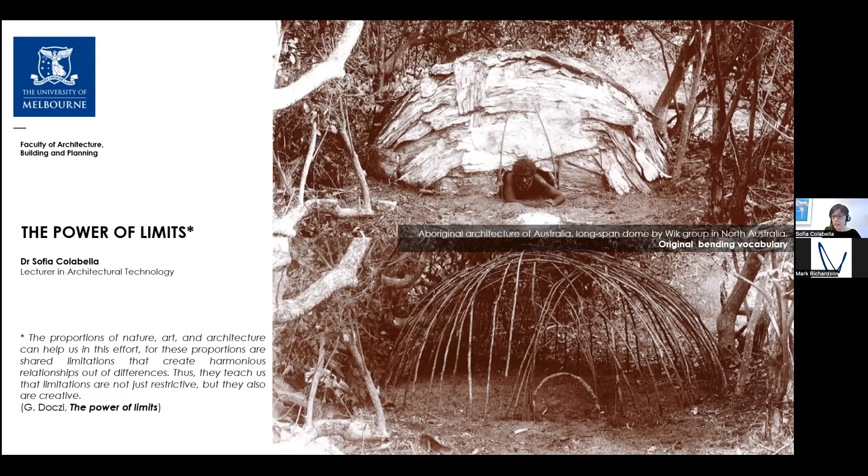My PhD thesis tested the hypothesis that socio-technical, environmental, and architectural gains could be achieved through innovative architectural and structural uses of small timber laths. At the time, I was still trying to understand what Ted Happold and Frei Otto had achieved on one of the most iconic elastic grid shells in the world, the Mannheim lattice shell, with its 4,700 square meter covered area and only 72 kilometers of 50 by 50 millimeter hemlock.

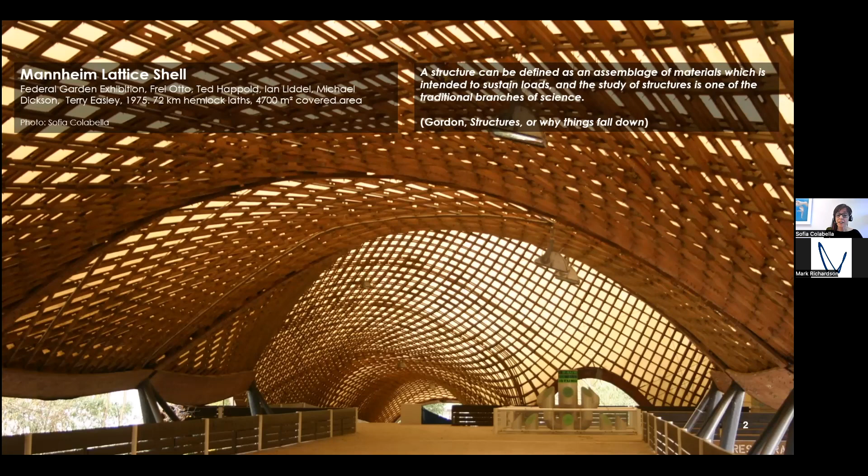From an architectural perspective, the critical advantage of active bending has always been the chance of free-form shapes with easy-to-produce linear rods. Since my doctoral degree, I've been designing timber grid shells and acoustic shells by combining advanced digital tools and low-tech building techniques. Among the outcomes of my PhD, I co-founded GridShell.it, a firm specializing in design and construction of timber spatial structures. And my former business partner and I started testing bending structures at scale 1-to-1 in 2006.

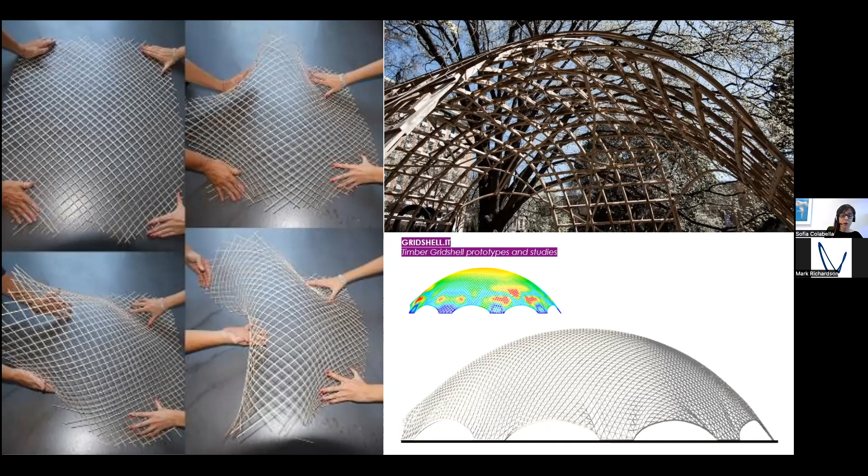We started with physical models and simulations of the design of the construction process, focusing on how the constraints and the orientation of the flat lattice determine the final shape. At the time, this was a story of trial and errors, and we learned a lot from failures, of course. 2012 was a milestone for us as we had gained good experience in grid shell construction and also started developing digital tools for determining the final shape.

This was a real-scale prototype proving the results of a form-finding tool written in Grasshopper by Daniele Lancia and Andrea Fiore to predict the final shape of a flat grid given the connections to the ground. It then became apparent that we had to flip the process and start from the architecture, so the final form, in a way to combine an optimal construction process with stability and the final shape.

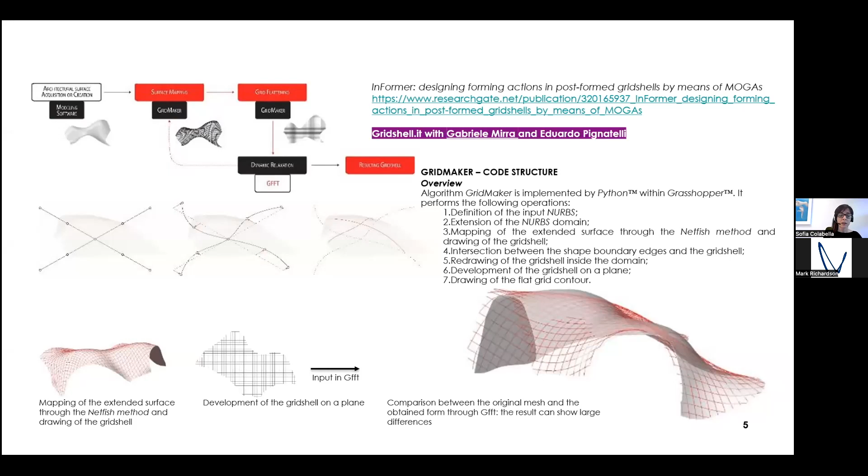In this case, we worked with Gabriele Mirra and Eduardo Pignatelli to develop a multi-objective genetic algorithm to discretize a generic surface into a grid of quads. With the Netfish method, we optimized the orientation of the grid to minimize the lath curvature. And then moving away from that as an independent researcher and passionate about large span architectures and environmental awareness, I extended my studies to discarded materials.

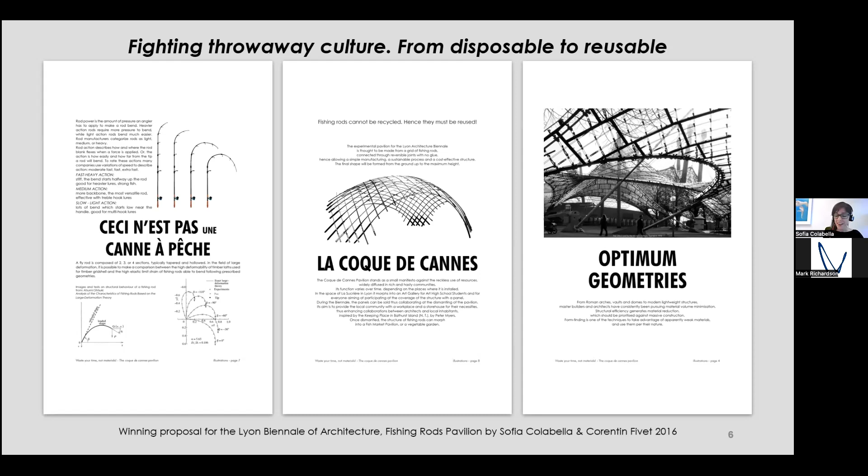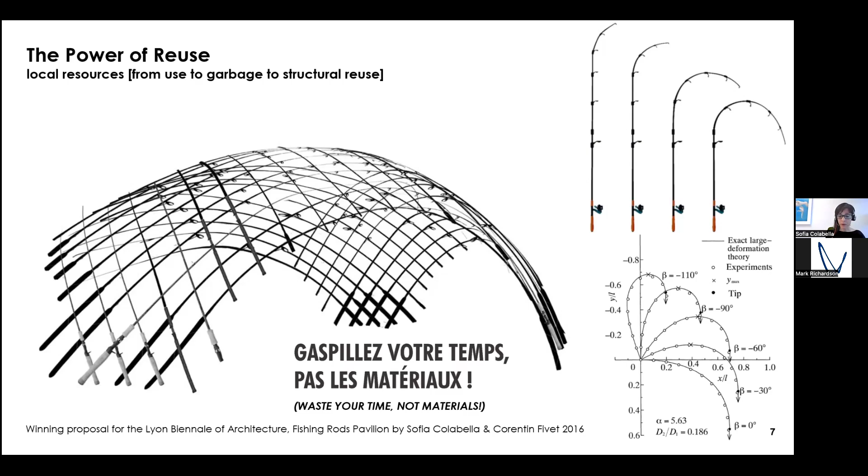And in 2016, Corentin Fivet and I submitted a proposal for the first Biennale of Architecture in Lyon made of discarded fishing rods because of their large deformation when in use. The committee of the Biennale, of course, was enthusiastic, selected our proposal and asked us to design a pavilion to be showcased around the city. However, we discovered then that Swiss people are not so much into fishing, and it turned out that skis were the perfect locally sourced material, as Swiss people throw away thousands of skis each year.

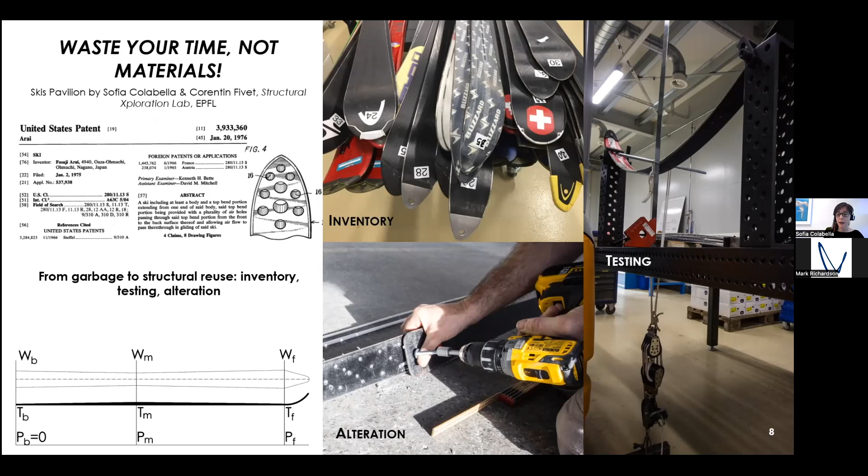And from a structural standpoint, skis have great potential for use as structural components because despite usage and age, they maintain their high-level physical characteristics, high breaking strain, as well as low modulus of elasticity. And obviously, the inventory was not the easy part, especially because skis are often covered by patents and their composition, elasticity and mechanical characteristics are difficult to determine.

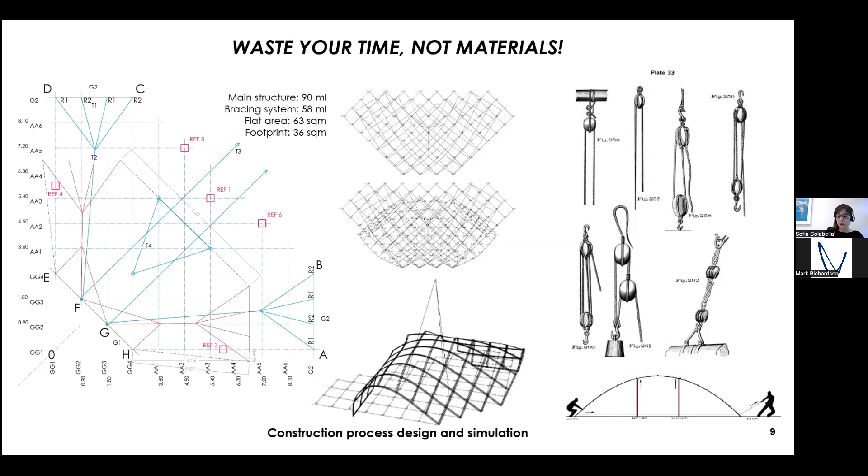Once I defined the modulus of elasticity of each pair of skis, I tested possible shapes derived from a dynamic relaxation simulation. The shape we selected was then converted into a construction process that had to be simple and cost-effective. So we chose to use the simple technology of the block and tackle pulley system, which allows trading force for distance. That was a way to also retrieve an old and discarded tool from the past.

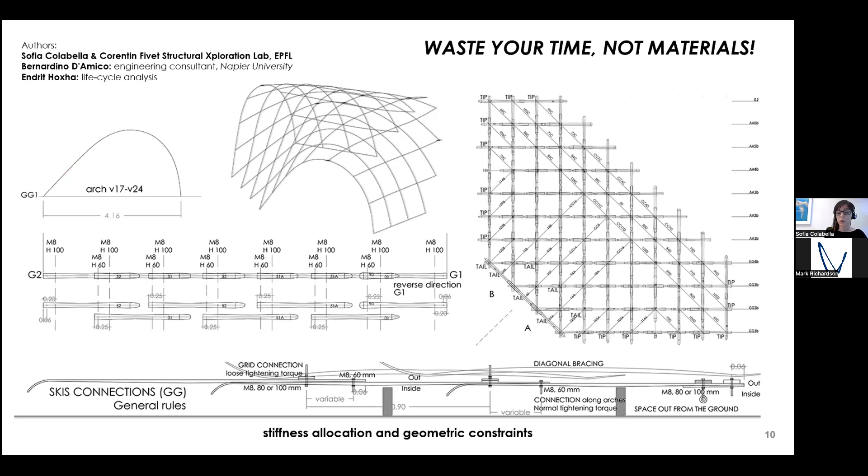Skis of different ages and types, of course, as you can imagine, had different stiffness and had to be optimized. However, the good thing was that with elastic grid shells, the geometric stiffness of the shell is not uniform as well. Therefore, the layout of the skis was designed according to the skis' elasticity, compensating for the minimum radius of curvature and the overall geometric stiffness to ensure stability and minimize deflections.

Corentin Fivet and I, of course, didn't intend to propose people to build with skis, but we intended to show that we can design with uncontrolled components with a sufficient level of confidence in the structure, safety, and performance by working on structural efficiency and redundancy.

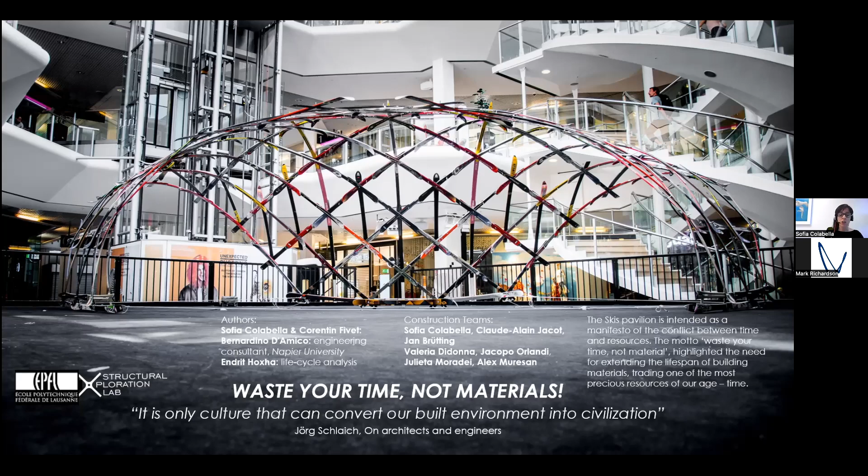The 36 square meter skis grid shell was made of 210 reclaimed skis. It was assembled and reassembled 6 times with traditional tools, also generating near zero waste. It showcased the value of waste, thinking out of the box of our culture, based on the idea that time is the most valuable resource we have. We acknowledged that designing with reclaimed materials implies a complete redefinition of the conventional structural design workflows.

Most of the research-based subjects, design studios, and intensive construction workshops I developed over time take advantage of all these experiences. So as a practitioner, as a carpenter, and also as an academic, active bending is also useful for performance-based design education, focusing on structural behavior and acoustics in my case. These subjects tend to acknowledge the responsibility of architects to minimize the impact on natural resources and design for longevity.

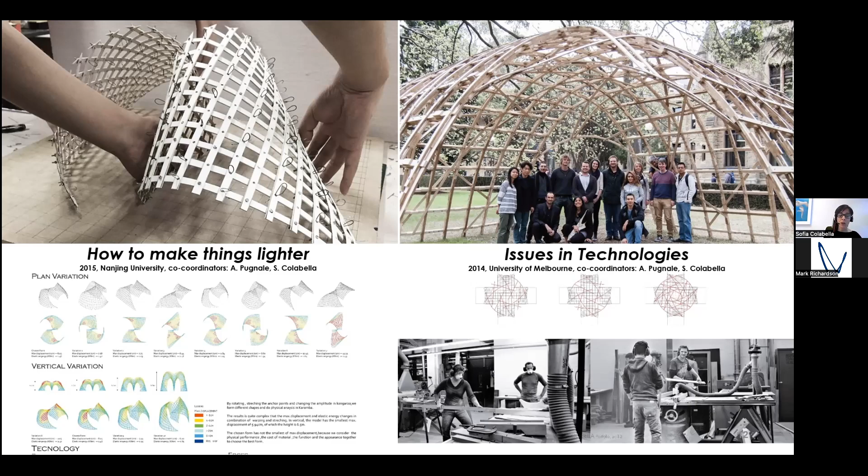In these 2 cases, how to make things lighter and issues in technologies, coordinated with Alberto Pugnale, introduced students to design concepts of form resistance to appreciate how different structural and construction strategies can shape design propositions.

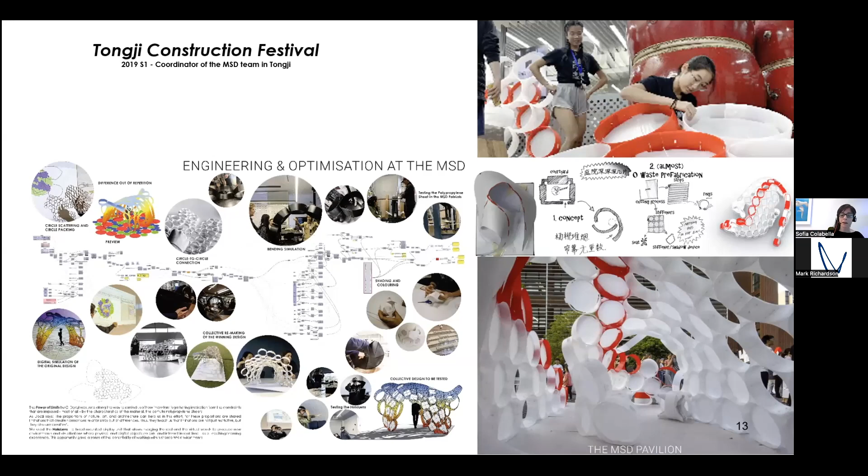For the International Tongji Construction Festival, I led a team of 6 first-year students from our faculty. All teams were given the same number of polypropylene sheets, and from these panels, we cut strips that we bent into circles. We connected these circles on the floor and then pushed them up into the final shape. Using this simple trick of the circles, we had a double bending action with almost zero waste.

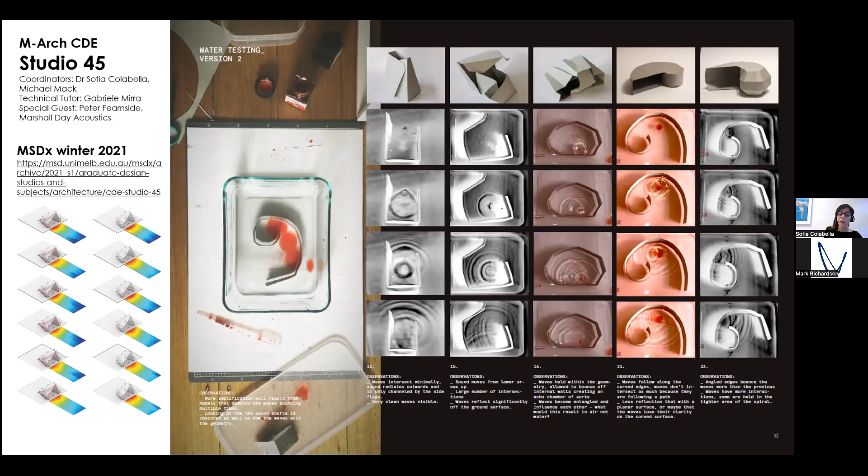I also use a similar approach to teaching at the master level. This is a design studio on architecture, art, and acoustics, where the concepts of sound, noise, and silence become a vehicle to test students' architectures. I developed this studio to illustrate how structural behavior and acoustics can drive design education and engage students in evaluative modes of design thinking, from performance-based, model making, and computational design.

Through several design exercises, such as the ones formulated by Jørn Utzon, Water, and other sound tests, students become aware of the geometric relationship between architectural form and acoustic performance. Shell-like structures are recursively tested through listening experience and acoustic simulations to visualize sound propagation and critically listen to design space using ray tracing and image source methods.

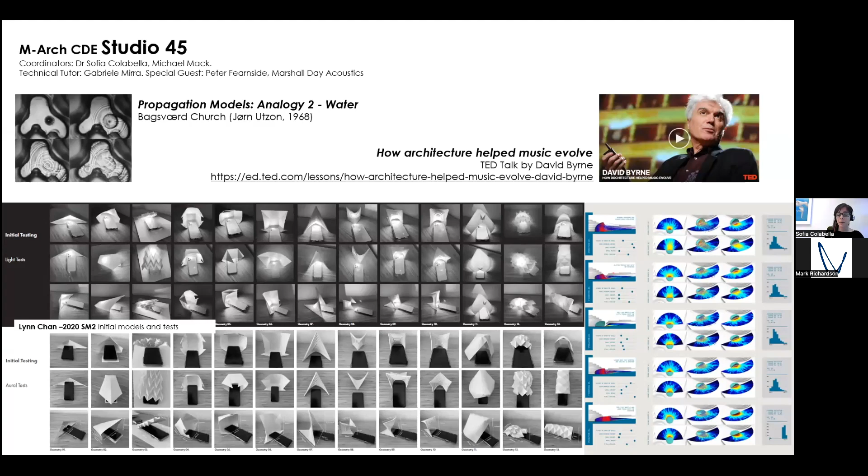The inspiration for this studio and this teaching and learning activity comes from a summer school on acoustics, VPM, which I developed with my former business partners in Italy. Here, performance-based design is combined with a low-tech and low-cost construction system to allow students enrolled in the workshops to build an acoustic shell before the commencement of an international classical music festival.

The design and computational processes and construction systems are developed to align with simple manufacturing processes and to enrich the experience of musicians and the audience in the difficult environment of outdoor space. The overarching idea is to blend digital tools, the history of construction techniques, and prototyping to offer a different perception of design thinking and making.

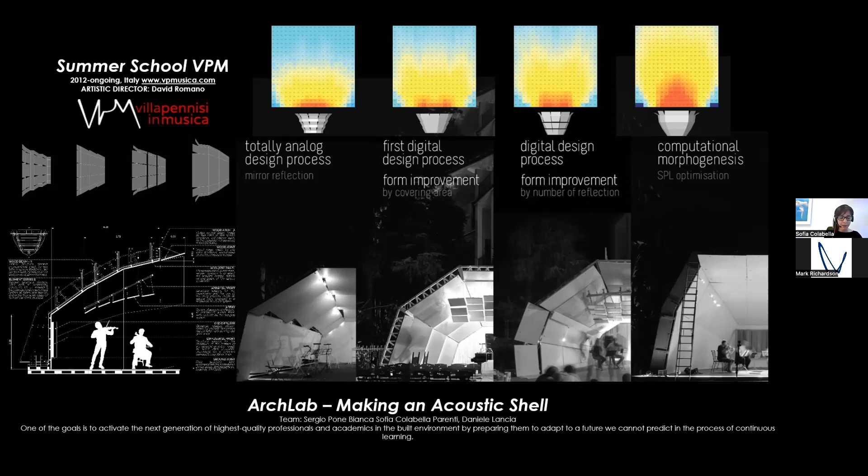And I am concluding this presentation with Calvino's Six Memos for the Next Millennium. Structures are everywhere in nature, as much as in language, music, architecture, and more. Like Calvino, I've always been interested in subtracting weight, especially in a world facing global warming and decreasing natural resources, because as designers, I believe we must take responsibility for it.

Sofia, thanks very much for taking us through your presentation there, a whistle-stop tour of some really fascinating things. We covered lattice shells, grid shell structures, discarded fishing rods, the reuse of skis, and the relationship between form and acoustic performance, and also very interesting to see that in application to education, which you covered so well. So thank you very much for taking us through all of those things in such a short space of time. It was very informative and highly interesting. So thank you so much for that.

Thanks, Mark. Let's move to our final section of the interview, because it's very pertinent actually to what you've just presented, in that it deals with questions around sustainability, and some of this you'll already have touched on. But what are your personal views with respect to the question of sustainability and spatial structure projects? How can sustainability be improved within our community and its outputs?

Well, so I believe that the concept of sustainability requires us to consider the long-term implications of design form from an economic, social, and environmental standpoint. And we know that there is no such thing as one solution fits all.